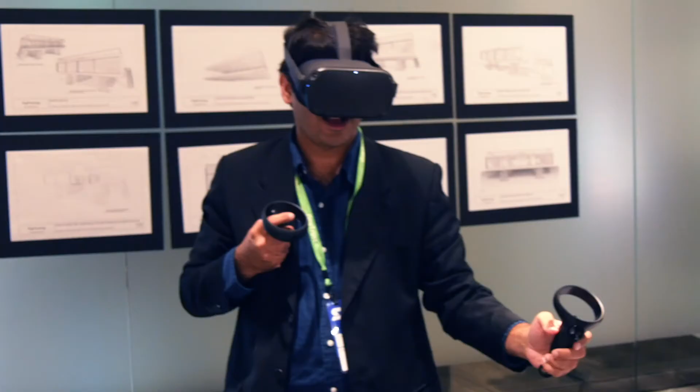Our next speaker has over 20 years of experience in structural design, project management, advanced computational design, and modeling. His portfolio includes everything from sports, structural art, and cultural projects to commercial high-rise infrastructure and aviation projects. He also has extensive experience designing and detailing architecturally exposed structural steel and concrete structures, none of which I could do. He's here today to talk about the future of AEC integration. From Thornton Tomasetti, please welcome Robert Otani.

Thank you. So there was a really good session just before about BIM, and I would say the talk that I'm going to give is a good follow-up to that, both on the sort of glass half empty and half full. So a little bit of a perspective.

Whoops. I have to load up my presentation. So let me just introduce myself really quickly while it's coming up.

I'm Chief Technology Officer at Thornton Tomasetti, and we do a lot of projects across the world, large scale to very small scale, and very complex projects. So we've been BIM adopters 100% since 2008. We were one of the first firms to dive into the BIM world because we saw the value and the potential value of BIM. But I'm going to talk about how some of the obstacles in how we work and legal issues are keeping us from seeing that value downstream.

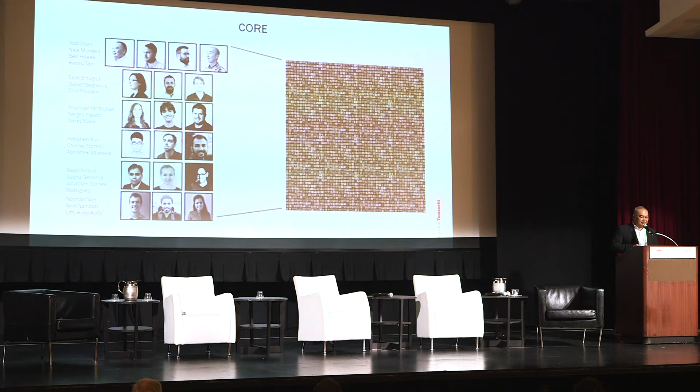And this is our team that I mentioned that is working on this all the time. We're almost 20 people. We'll be 20 people next month. 14 of which are software developers who just happen to learn software development and also be architects or engineers. Most of these folks are architects, actually.

So the TTWiiN Accelerator, I kind of mentioned, I'm going to go through this very quickly. It's valuable to understand that some of the IP that has been generated in Thornton Tomasetti has probably more value outside of the firm and can touch more markets than just the engineering field. So these are the four entities. OnScale is a multi-physics solver, just got Series A funding. Konstru is an interoperability platform, fully data-centric, which I'll talk about a little bit today.

Hummingbird is a tall building damper that was co-developed with NASA, and is basically half the size of traditional dampers and significantly less cost. And you're going to see a lot of those on tall buildings in the future. As well, Pumpkin mounts is more of a defense industry item that protects equipment from shock and vibrations.

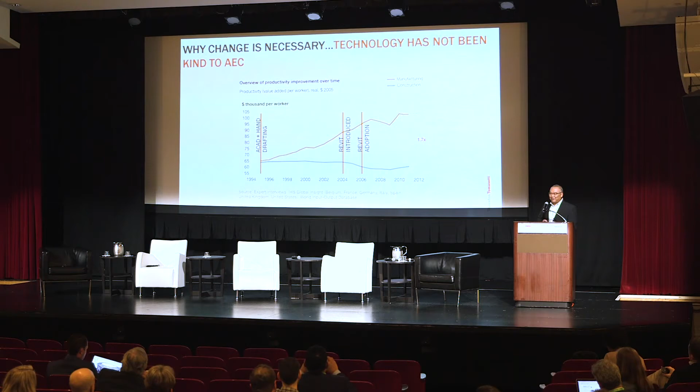Revit was introduced in 2004. Revit adoption started in 2006, and you can see the trend is as the power of BIM has just not been realized by our industry. And so I'm sure you've all seen this.

This is a really good graph that HOK had put together showing how we could, as an industry, do a lot more with these very advanced tools up front to create a smarter design and then do a more detailed design down the road, as opposed to trying to figure out problems along the way, and then also have less impact on the overall cost of the project. So this is still very true, but we still haven't seen those gains in the construction world.

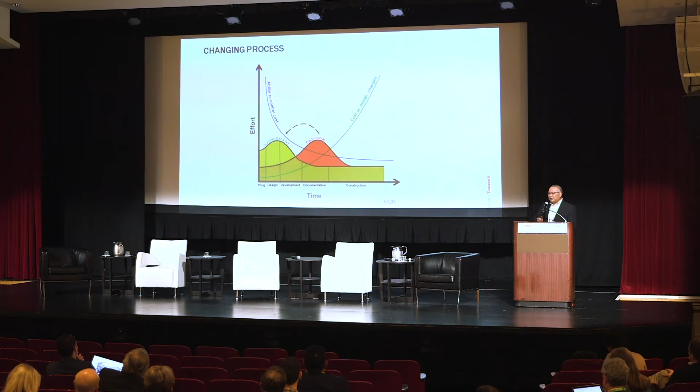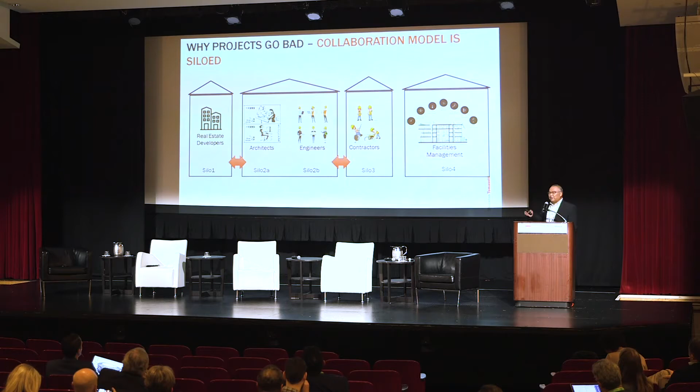So I'll say that one of the reasons is that the model of how we work is still very old school. And so this is the typical siloed view of how we work. It starts with a developer, an owner who wants to build a building, hires an architect, usually the first entity that they hire. And then the architect is responsible for hiring the engineers, and then it's a very linear way of working and transferring information.

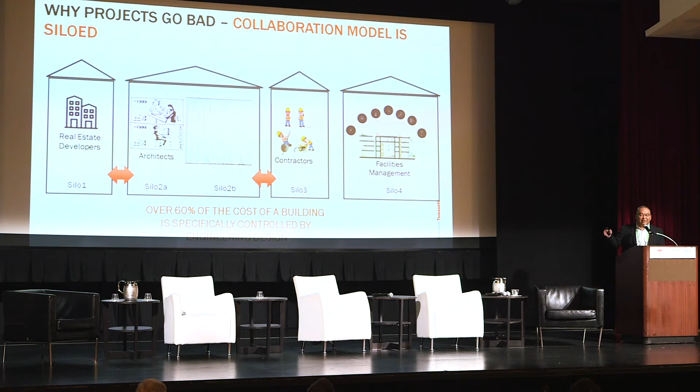But usually, to this day, some concept level designs have no involvement with the engineering team. And you can see over 60% of the cost of a building typically is directly related to engineering. So if you don't have the experts at the table at the right time, you're already potentially going down the wrong path. Contractors, even worse. Many times they don't see the project until it's time to bid the project. And guess what? At least 90% of the cost of a project is in the construction world. They should have a seat at the table early on in the process.

In facilities management, I would say institutional projects is where we ever have any idea of what the FM folks want in their project and need to maintain their building in an efficient way. So this is where we are. And it's not a good model, and this is the model that is being disrupted by the Katerras and the WeWorks of the world by stringing these ideas together.

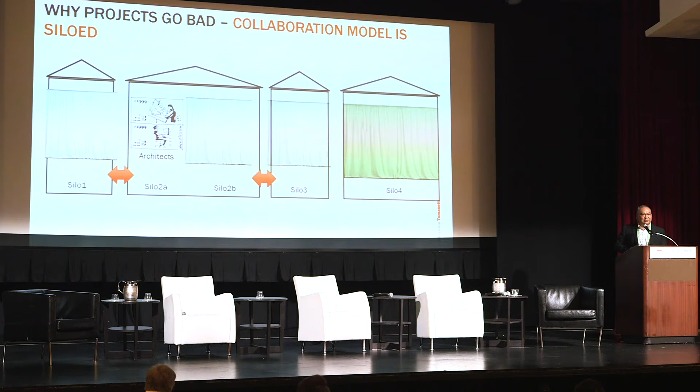And guess what? By not having all the right players at the decision-making period, the owner has the curtain drawn over their eyes, and they're stuck with potentially super cost overruns when they're not anticipating that. So this needs to be the model. This is just a general idea that everyone who has stake in the game, who can make an impact, needs to be at the table at the right time. I'm not saying the architect doesn't lead design, they always should lead the design, but the other experts in the field who have an impact on the built project need to be there and making decisions.

So, the promise of BIM. I would say part of the problem is the standard of care, which was developed, I'm going to say, back in the 30s. I've worked on Rockefeller Center buildings, and the projects are literally drawn on canvas. And so the only difference is that the canvas you can't throw away very easily, right? Paper you can. So this is where we are. We have the power. We have the Ferrari here.

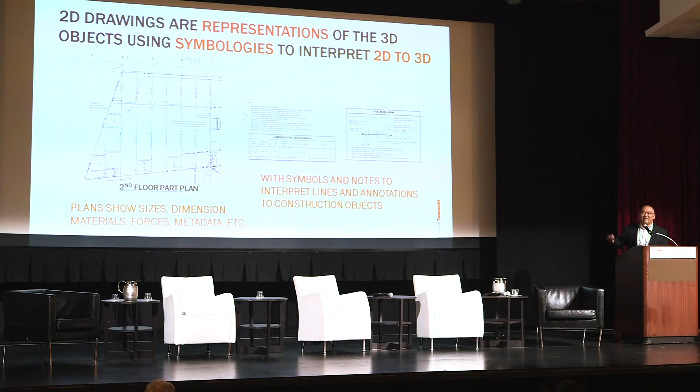But let's talk about that. So what does a plan actually do? It represents sizes, dimensions, materials, forces, other metadata, strictly by symbology, right? Symbols, designations that this represents this in the 3D world. But guess what? We already have that. It's already in the model. We're taking a really complex thing and making it really dumb, and the dumb thing is what goes to the contractor, which is unfortunate.

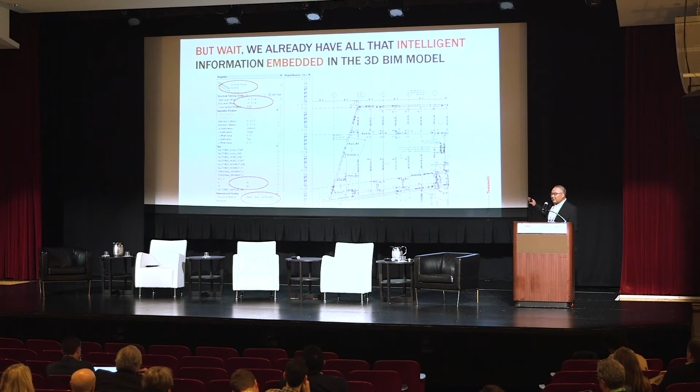So again, this is the web-based platform. I click on that element. I have all that metadata, that really smart data that I'm also showing in representational form in 2D documentation. That doesn't make any sense to me. There are some things that are okay in 2D, but for this type of information, it doesn't make any sense. So this is our Konstru platform. I mentioned the Konstru platform. This is a database sort of environment.

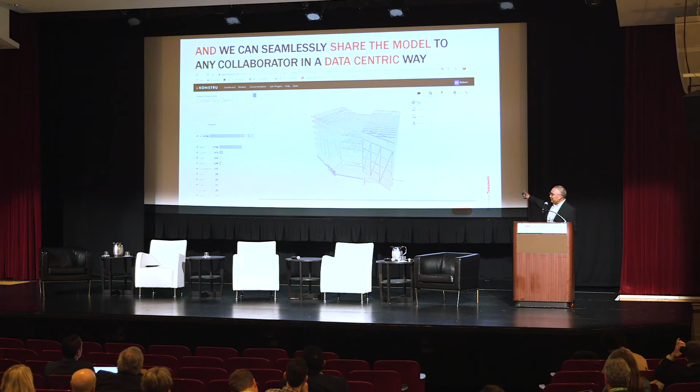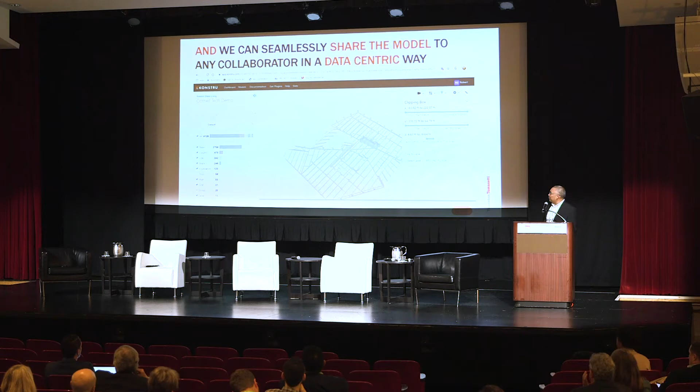This just demonstrates this building in 3D showing that same element. So this is uploaded from Revit. We have a nice little viewer. I can hone in onto the second floor, which is where that plan was taken. Spin it around. Also, you get the other advantage of 3D, which is you get the spatial recognition of the adjacencies of this element and the complexity of the building and all of those things.

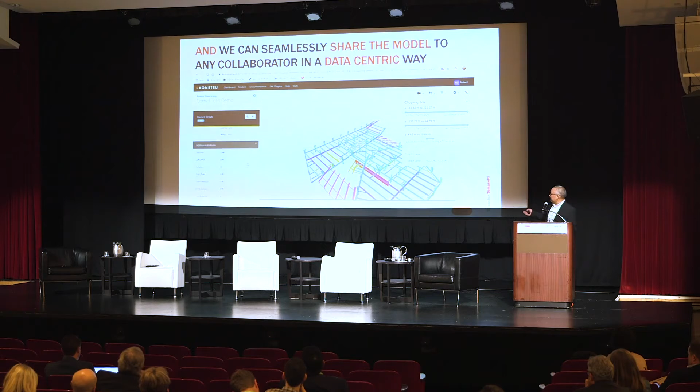And guess what? All that data-rich information is all embedded in the model that we can access. So again, why the 2D? It doesn't make any sense. So for building departments, obviously they still need some documentation, but we talked to the Commissioner of the Department of Buildings in New York City last year, and he told us the only thing that we look at is fire egress. And I was like, why am I going crazy issuing all these drawings, spending hours and hours at a time, creating a 2D set that they're just going to throw in a bin somewhere?

So I would argue that as an industry, we need to create a value proposition for jurisdictional building departments, building code officials, that we're going to issue a digital twin at some point. Now, they're going to get significant value from that. Imagine the building department not only has some representational 2D drawings, but they have a 3D model, fully data-rich, that they can actually use for their everyday operations in the city, as a smart city.

Again, they're interested in the egress diagrams. Fine, we'll give them that. We have all of that. Safety diagrams. We have all the fire access. We have all the infrastructure, all the piping, all the things that they need as a city, as a jurisdiction to manage their city. We can give them that. And so it's not just to say, okay, let's just issue 3D drawings to a contractor. We also have to give a value proposition to the jurisdictions.

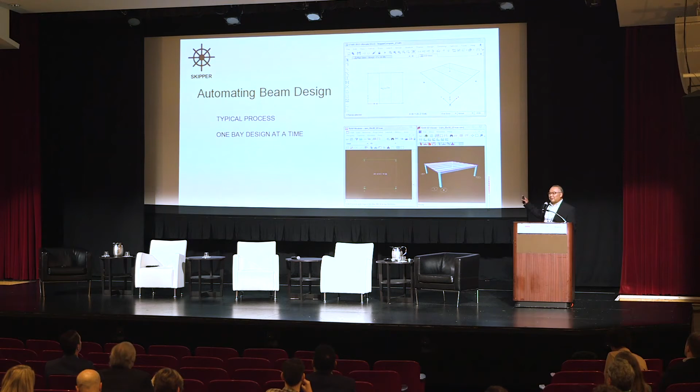We recreated this platform. It's a web-based platform. Anybody can use it. I could use it on my phone right now. I can do any number of designs, fully designed, including vibrations, in seconds. And so I could do it at a meeting. I could do it while I'm taking the train or something. It's opened up significant value. And we actually have some other engineers, like Katerra, testing this out. So they see the value in it as well.

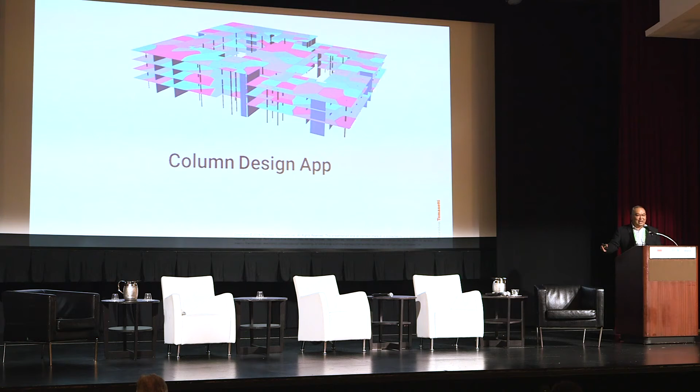Column design app, ubiquitous column design app. Something that I used to sit there with tracing paper on the table, manually tracing out all the contributory areas of floor relative to columns. But BIM has made it harder. We not only have to do that, but you have to get that in a very smart way into our BIM models. So we've closed this loop of getting from our 3D model to our design spreadsheets back to our 3D model.

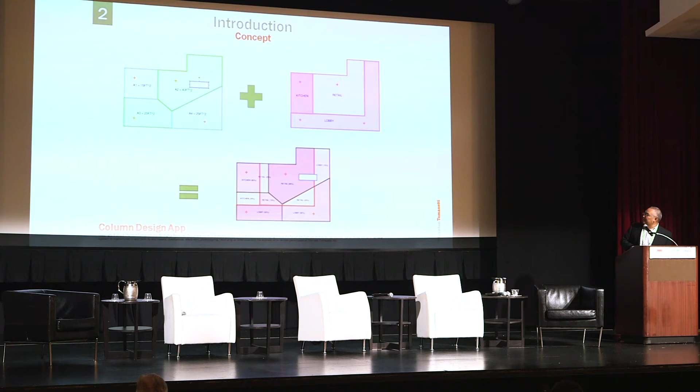So it does these area takeoffs, but it also includes the overlays of load programming, which actually is not necessarily consistent with the area of the tool. So this is a quick video. I'll talk through it as it goes along. By the way, this was also a research project at our office that has now become an everyday tool.

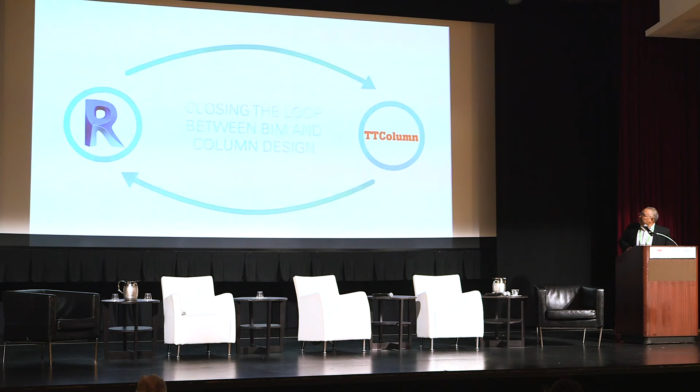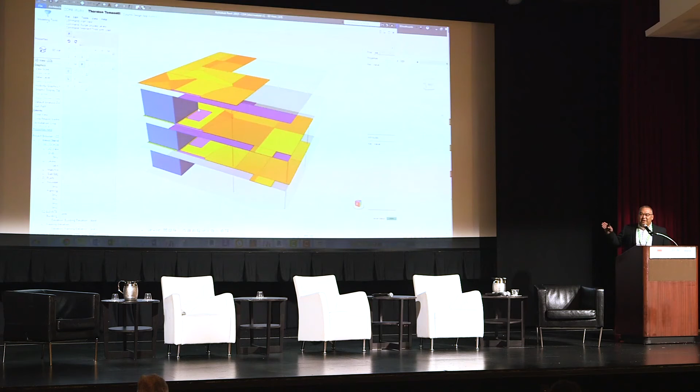So we start out in the Revit platform. Usually at SD, we have some sort of bones of a Revit file. We export it into a desktop platform that we do a lot of repairs. So we sort of flatten and simplify the three-dimensional geometry into a sort of virtual building representation of that BIM model. We apply the occupancy areas of like hallways and retail areas and whatever the different loading conditions are.

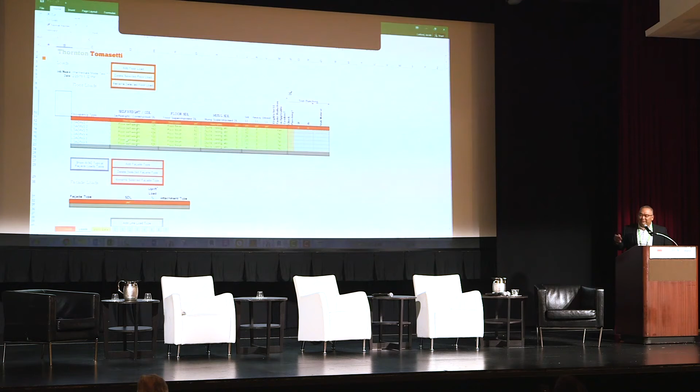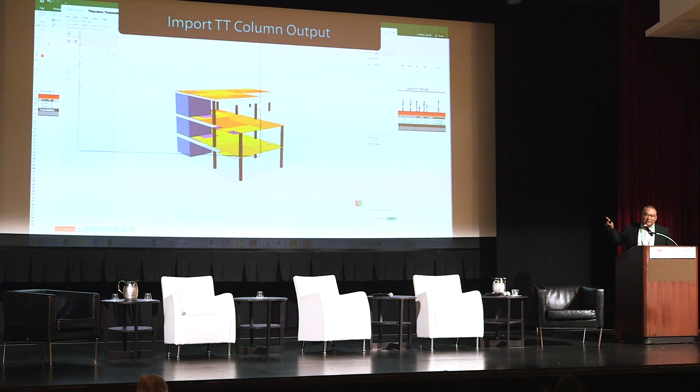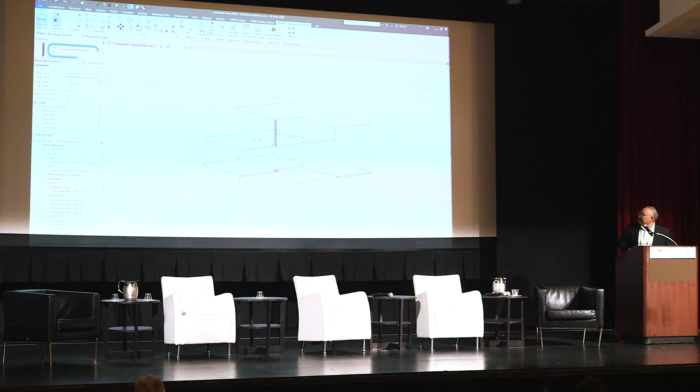It dices and slices that floor loading really quickly, puts it into our very robust TT column spreadsheet, brings it back to the platform. Now we can view the results in the three-dimensional platform, confirm that it's okay, and then we push it back to Revit. So no manual markups, no manual takeoffs, no manual drafting, fully automated workflow, and no mistakes.

Swarm. Swarm is a new app that we are going to release at our conference in October, the AEC Tech Conference. If anyone's familiar with Rhino, Grasshopper: Rhino is a three-dimensional modeling platform. Grasshopper is a visual scripting platform that allows parametric design, very powerful design. The unfortunate thing is it's kind of why some people are software developers and some people are not. The people who are software developers get that very clear sort of nerdy logic, right? Others don't want to spend the time learning all the languages and things.

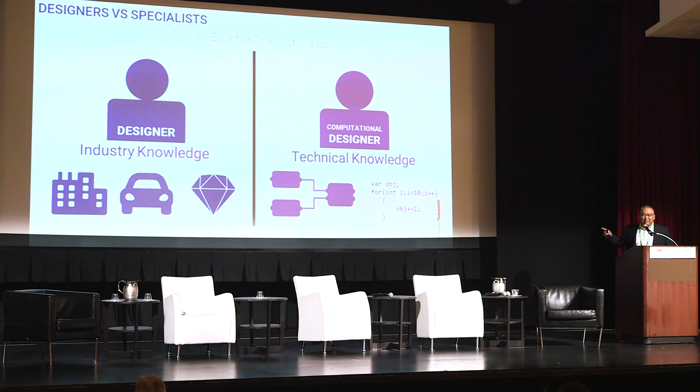Grasshopper is very similar. No matter how much training we do, probably only about 5% of the engineers latch on to this concept of parametric design and big design space. So the idea of this is to put that power of parametric and computational design into the everyday user. So the industry knowledge person, someone like myself who has 20 plus years experience, doesn't necessarily have the time to learn Grasshopper or become an expert, but we do have those folks. Every office has those folks. So the idea is to get that power into the hands of that designer.

So that user also doesn't want to change platforms. They're in Revit, they want to stay in Revit, or they're in Rhino, they want to stay in Rhino. They don't want to use Grasshopper and all these other things to get all the geometries out, do the interoperability. They want something that's going to be a click of a button sort of use case. The author struggles to get their designs and their computations to the user, particularly in a large office like ours. So the idea is that we give the developer or the author a platform to share that knowledge across all of these different users.

And by the way, because all the design computation is happening in the cloud, this can not only work for the Rhino platform, but can work for pretty much any of these other platforms. Illustrator, SketchUp, Revit, SolidWorks, Fusion, whatever. We're going to start with Rhino and Revit as our first, probably go to Illustrator next. So this is just an idea of how it works.

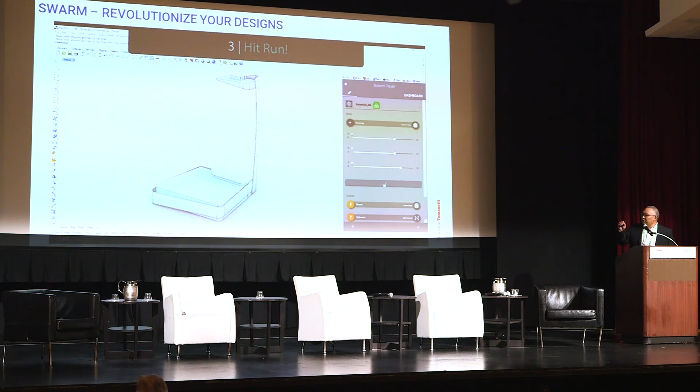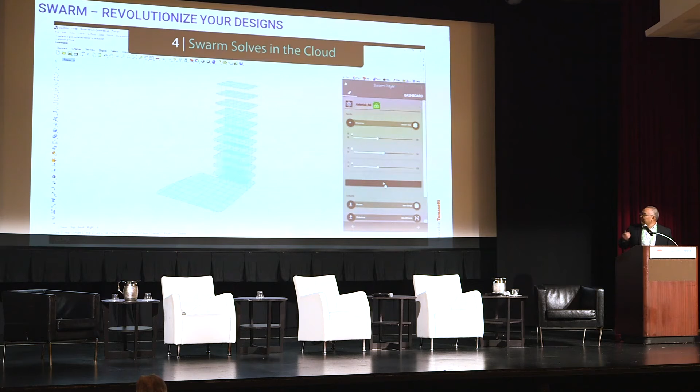So again, this is three-dimensional manipulations being done in the cloud, being presented to the user who has no experience in using these tools. In this case, we're going to do a structural wireframe generation developed by a script. So purely from a massing, all someone has to do is pick those massings underneath that draped facade, move the sliders around to the geometric configuration they're looking for, push the button, and the result comes out. Change the parameters, regen, and recompute.

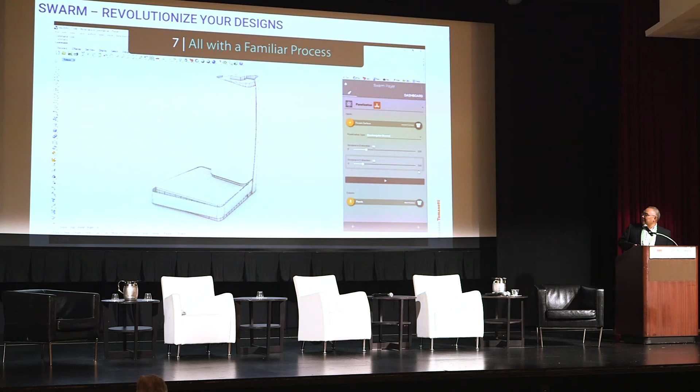So again, this person who is using this has no experience in any of these computational design workflows, but they now have access to that power. This is just a further case where now we're going to do a facade geometric generation. So the idea is to put the power of the expert user into the everyday user.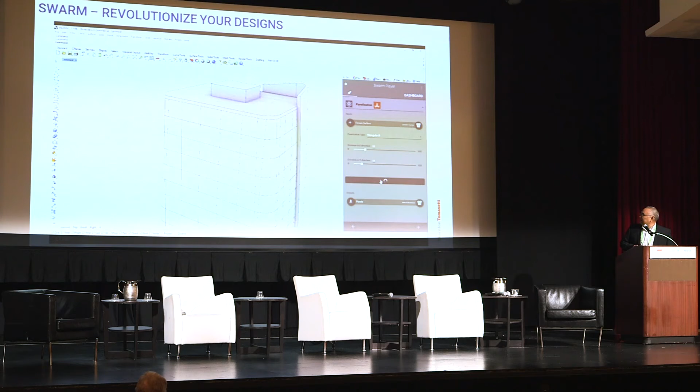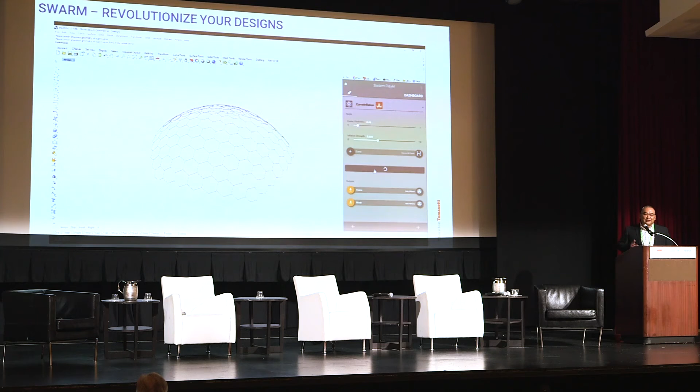So what's under the hood here is Rhino put something out called Rhino Compute, which is basically a Rhino service occurring in the cloud. So we're actually calling these cloud servers, running the analysis up there, so they don't need to have any of the hardware installed. They don't need the program. All they need is a web browser, basically.

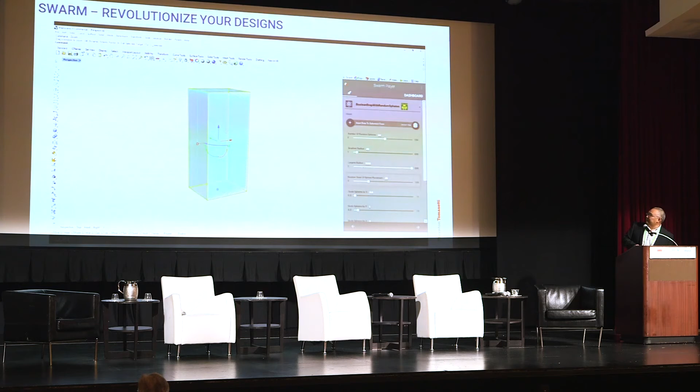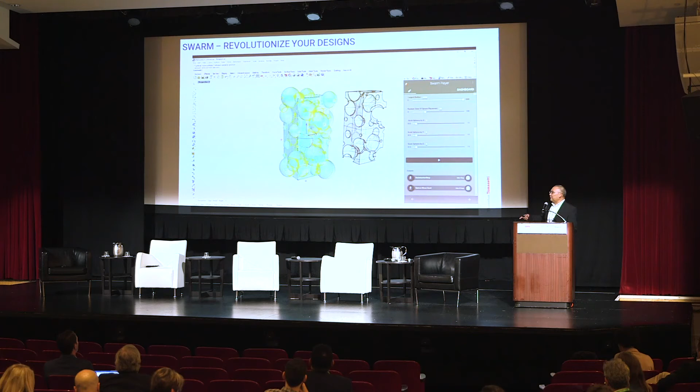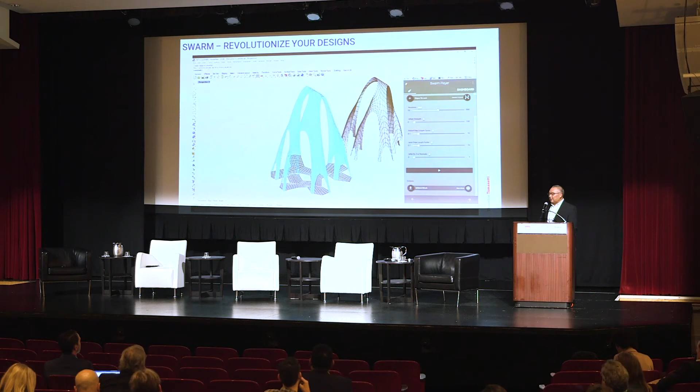Some of these get a little funky, but you get the idea. And by the way, this stretches across multiple sort of markets. I mean, Rhino is probably the #1 program used in, let's say, sneaker design, boat design, jewelry design, as well as architectural design. So it's a huge design space, and this is something that could open up that power.

So I want to talk a little bit about AI. Again, I mentioned before how we've developed those tools with the intelligence of the firm. Now, the other thing that we're actually looking into is how do we take the intelligence of the firm and put it into an app, basically an artificial intelligence app. And I'm going to talk about Asterisk, which is something that we, in a way, started looking at in 2015. I learned about machine learning back then, and I saw the power of machine learning, what it potentially could do.

So we built this application that just from a massing, just from a sort of envelope of a building, can generate a full structural design at concept level in under a minute. Something that a team of engineers would take 2 to 3 weeks. So I can do one iteration, one design in under a minute that most engineers would take 2 to 3 weeks. With the embedded intelligence of engineers in the app.

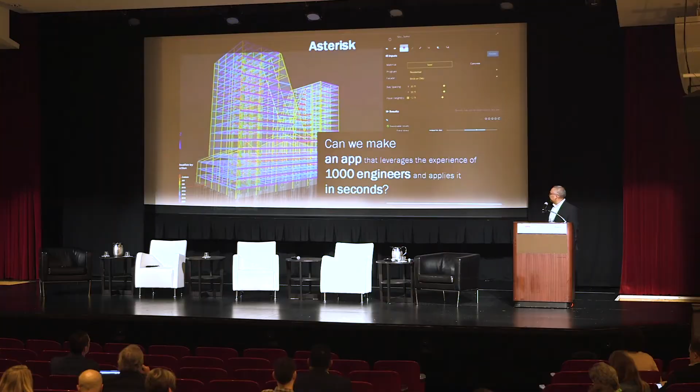So this we released internally last year. We have opened it up to some collaborators. The second highest user of the app is an architect from KPF. And he keeps saying, I'm only playing with it, but I don't know, 300 times using the app is quite a bit. So we may send him a bill pretty soon.

But anyway, it's calculating, right now, a steel building. We're changing some of the geometric parameters, floor to floor heights, changing to concrete, and it's recalculating. So beams, columns, slabs, floors, core walls, core bracing, and foundations in under a minute. And everything's cloud-based here. We're storing all the results in the cloud, and then having a nice robust data visualization so we actually know that it's doing the right thing.

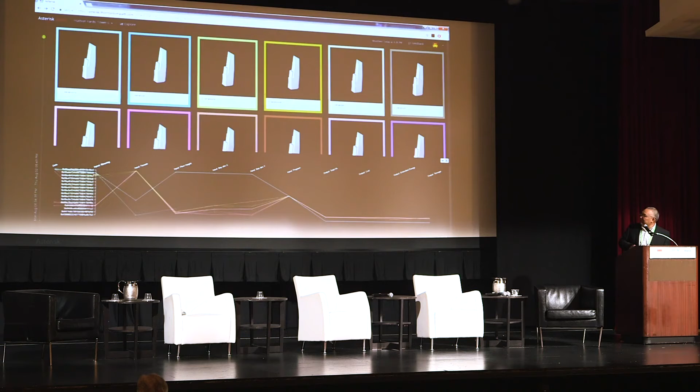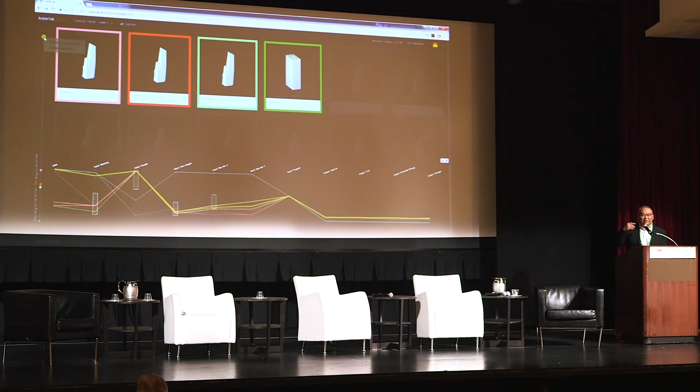And then we have a method of comparing all those options so a designer can pick and choose what metrics they're looking for from an optimization standpoint. So we showed this to architects, and it's funny because most of them don't know what to do with it. It's beyond the realm of what's normal. And so some of this artificial intelligence is going to be training people how to leverage real significant computation.

So I'm going to talk about delivery. Delivery, I think I mentioned, doesn't make any sense right now, but there are some really good examples where it has made sense and it has paid huge dividends. So in 2016, we did this project with SHoP Architects in Miami, which is still there. It's in the Design District of Miami. It was only supposed to be there for 6 months. It's now 3 years, still standing. It's made of plastic. Branch Technology, a startup 3D printing, additive manufacturing firm, was the fabricator.

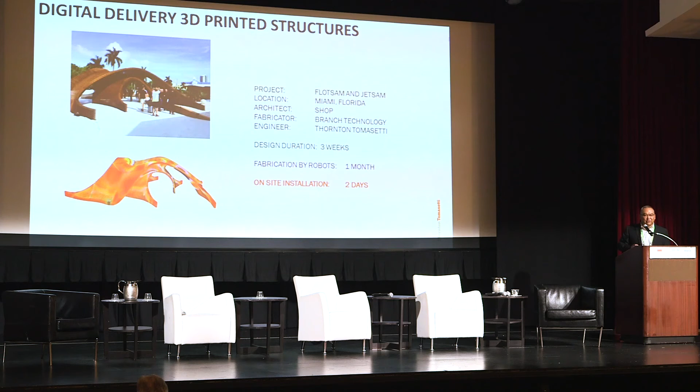We had 3 weeks to design this thing, and that in itself was innovative. But I think the real demonstration here is that we never issued any drawings. And we had a full-scale project, a pavilion, fully customized, and it was installed by a bunch of architects with zip ties, literally, in under 2 days. There's actually 2 of them. This was the first project that we worked with them on and showed the power of 3D printing technology, but also the digital workflow of communicating in a single platform.

The second one is the largest 3D printed spanning structure in the world. It's called One City. It's in Nashville, Tennessee. This one's obviously a lot bigger, a lot more parts, a lot more computation involved, but again, a full-scale project. I mean, if this thing falls down, it won't hurt anybody. It's so light. The material, ABS it's called, is very weak, actually. You can break it with a finger, literally. So that's why the engineering part was significant in this.

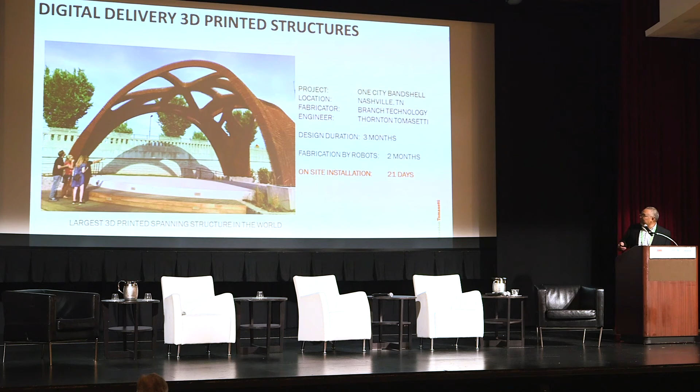And this is a quick video of the process, which we submitted as a paper at the International Association for Shell and Spatial Structures Congress a couple years ago.

So we started out with a very sort of, I would say, generic pavilion style, went through significant engineering iterations. Again, this is using Grasshopper, by the way, of both topology optimization, form finding, variations of the above, to come to a design that could be constructed fast, but also, this is a permanent structure, by the way, so ice, wind, snow, it had to resist all those things.

And you cannot do this without computation, I can tell you that. Trying to do this by hand, forget it, it's not done. Similarly, we didn't issue any 2D drawings for this. All 3-dimensional issuance, client super happy. And it's really not that you're going to have these every day, but it sort of demonstrates how powerful it is if we have a correct platform for design, delivery, fabrication, and construction, that you can actually do things that are way beyond the norm of traditional construction.

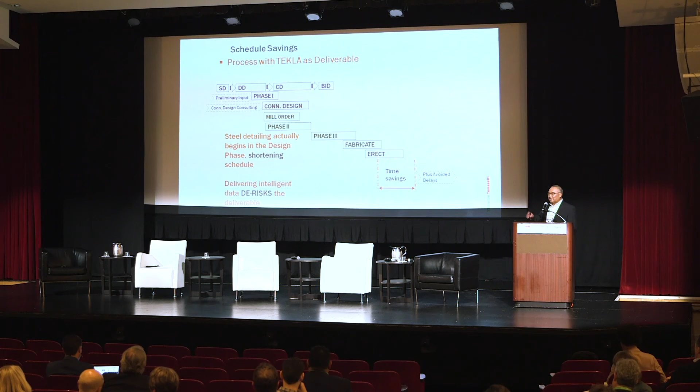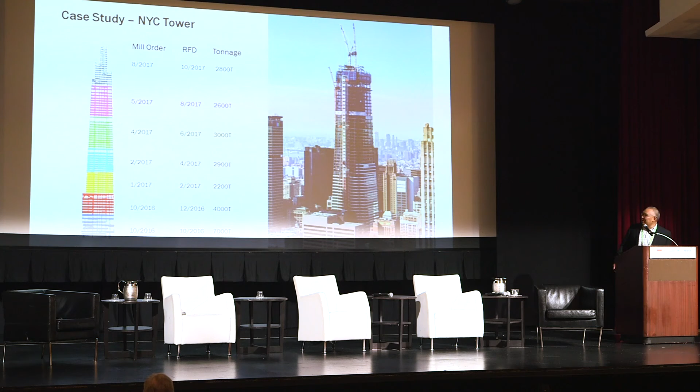So we believe that this methodology actually de-risks the project. If we, being smart engineers and architects, can embed our intelligence all the way through, then we actually de-risk it. If you leave the huge interpretation from 2D to the contractor, that's significantly risky. So this is an example project in New York City, 1.75 million square feet, I believe, where we did this project with the advanced project delivery methodology.

And this is coming from the owner, not from us. 8 months saved from the overall schedule. Now, 1.75 million square feet of leasing is a lot of money. So value proposition, it's a no-brainer. In a way, I wish our fee was leveraged against that. But that client will not go any other way now. So it took a really smart client to do this, but we see this is the way, the future of how we do work.